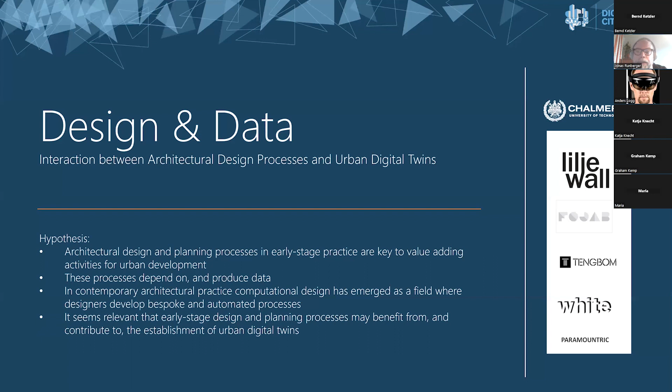There is also an emerging or quite established field referred to as computational design, meaning that architects and designers develop bespoke and automated processes that deal with data. So for us, it seems very relevant that early stage design and planning processes can benefit from and contribute to urban data in different ways, also at the architectural scale.

The objectives have been to identify data-intensive processes, develop automated design workflows that can use and deliver data to urban digital twins, and map these to propose a framework for how data can be exchanged.

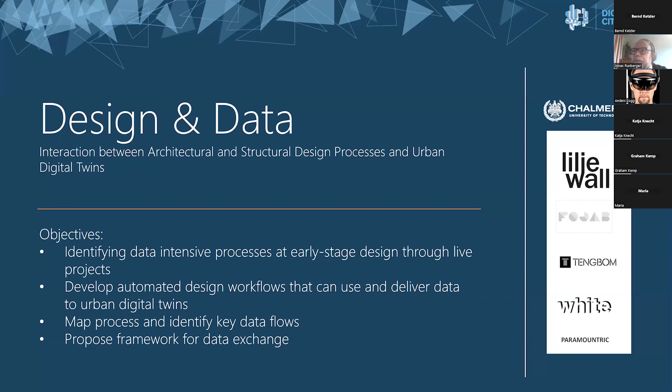There are three main application areas that depend on the partners you can see to the right: Chalmers, but also Liljewall, FOJAB, Tengbom, and White as architectural practices, and Paramountric as software developer. These areas include bespoke generative design and processes at different scales, processes depending on architectural and structural design, interoperability and collaboration, and design to manufacturing processes.

There were a number of case projects involved, coming from our partners, and that was a key asset - we considered using live cases. Many of these were collected, some were not used so much. In one case, a project was used only to test different cloud services. We had some organizational changes, and one of the cases moved actually to another milestone project.

I will talk now about 4 cases and go quickly through them to give an idea of what these processes can be like. The status is that these cases have been completed, but we're still doing the final conclusions on a framework that can enable this exchange of data.

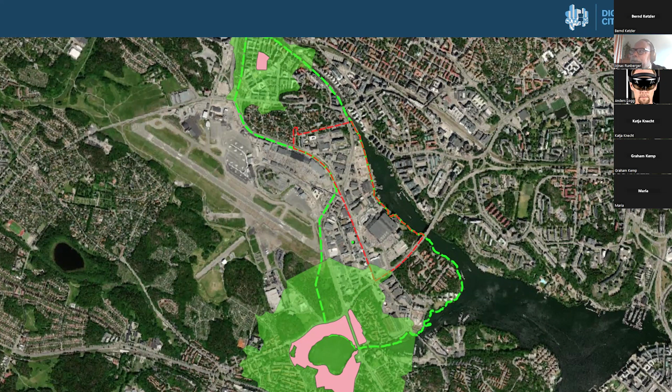This is Bällstahamn, northwestern Stockholm, where Tengbom had developed a scheme. This is the particular area - I will not go through the developed proposal, but rather look at the workflows that were explored and tested.

In this case, the input used was GIS data from QGIS as a test. I will come back to Speckle as a platform used for data exchange. An urban generator was developed, and there were also tests for a building generator, and finally a validation of the result.

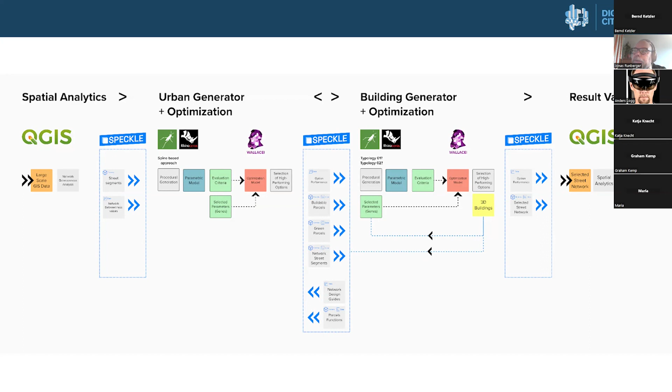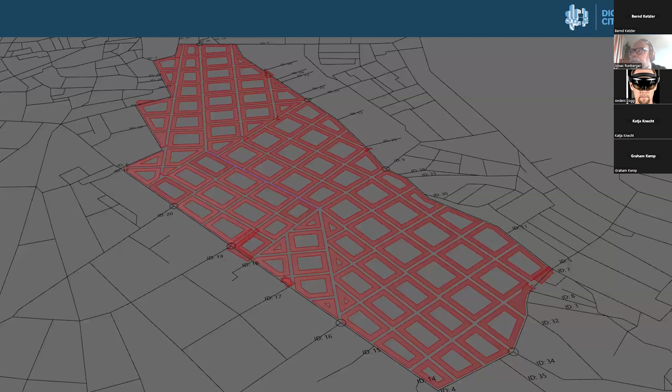This, on one hand, also depended on space syntax integration analysis and how the proposal affects that. But in essence, it was a quite direct exploration of the possibility to generate alternate street networks and see how that affected the surroundings.

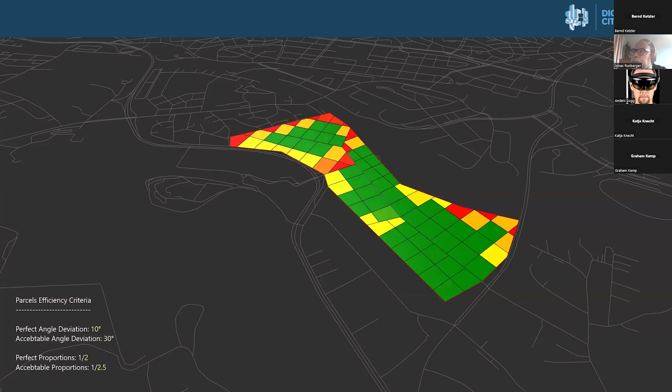Also, to certain extents, volumetric generation. One important notion was the assessment of parcels, the plots for buildings or other development. That was a key aspect analyzed in terms of its complexity or potential use, and the color code indicates that.

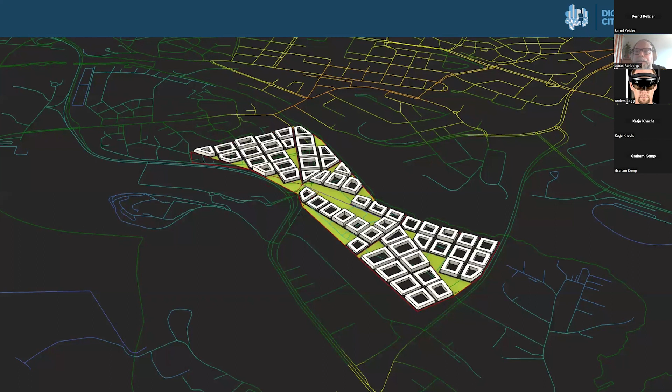There was, as mentioned, a very basic generation of urban volumes here as well, fully automated. The cloud connector Speckle, which I will talk about a bit later, also enabled a visual aspect where the data being streamed could be reviewed.

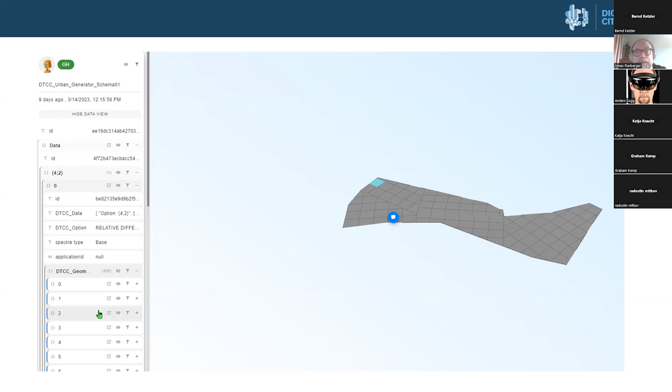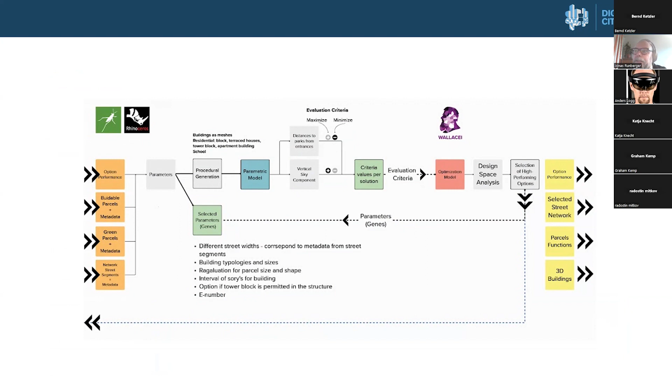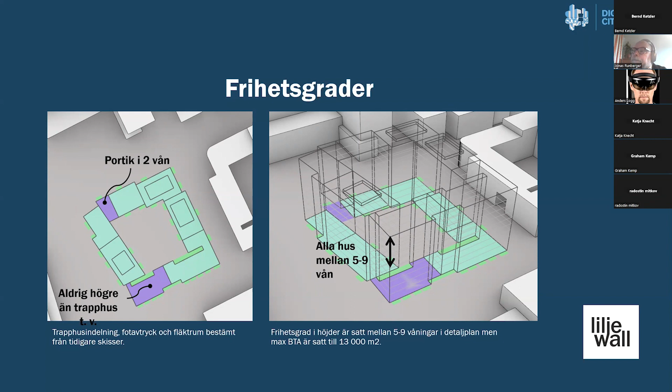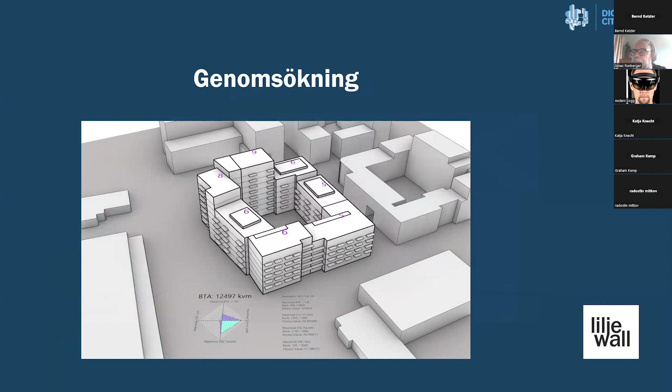A final step also tested a bit more on the building generator scale, based on input from the first process. This relied quite a bit on development done by Liljewall. These are some examples from their work brought in as a case - these are bespoke generative processes developed by themselves.

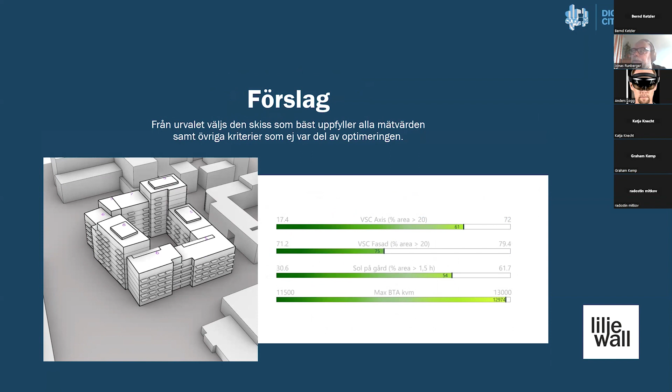For assessment, there are many other initiatives in this field now, but the second case relates more to design structure interoperability, but also design processes. It was brought in by White Architecture, where I was also at the time, and still am - a commission for 4 bridges developed in parallel in central Umeå.

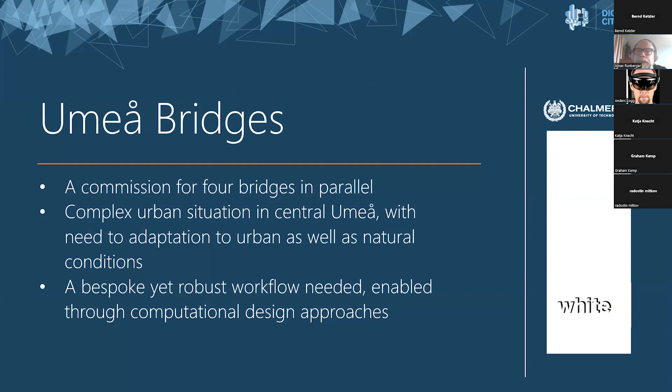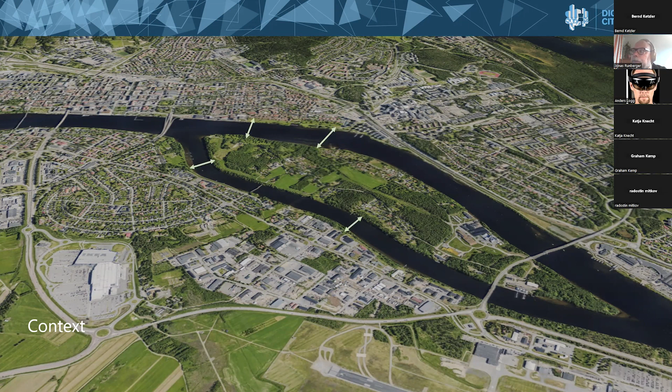This led to a quite complex process with the 4 parallel design proposals being brought up, but also the complexity of the urban situation. This set the need for a bespoke but quite robust workflow and a design system that could allow us to work with this. Briefly, the site, Norra Ön in Umeå, the new four new connections.

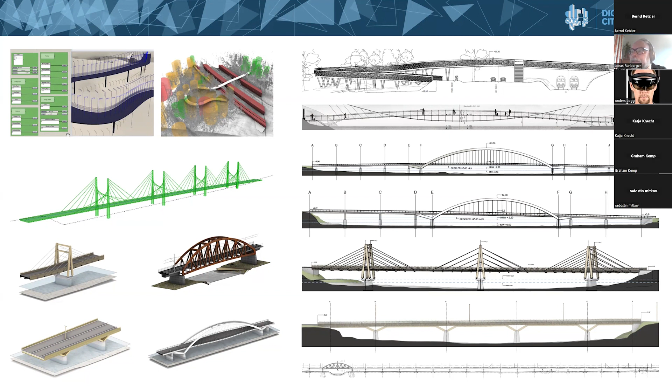And the design methods developed and used were also based on other bridge cases that we as a team had worked on. But that led to a quite good understanding of what's needed to explore the design, develop its geometry, and later on potentially also set it back into an urban context.

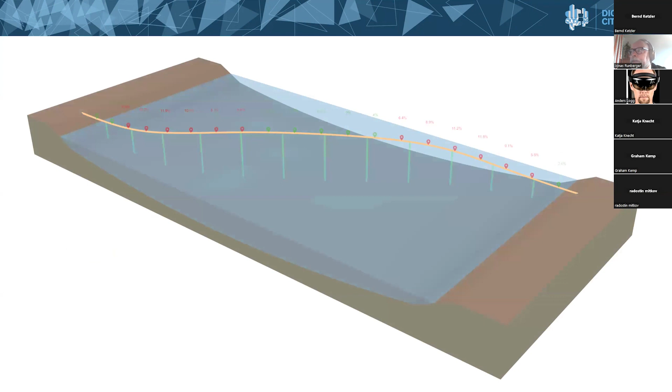The bridge principle itself follows quite a linear workflow with a number of different definitions. I will just now quickly step through a graphical presentation of this toolkit, which also includes analysis in different ways. There's the possibility to first automatically model a very simple geometry for rapid processes.

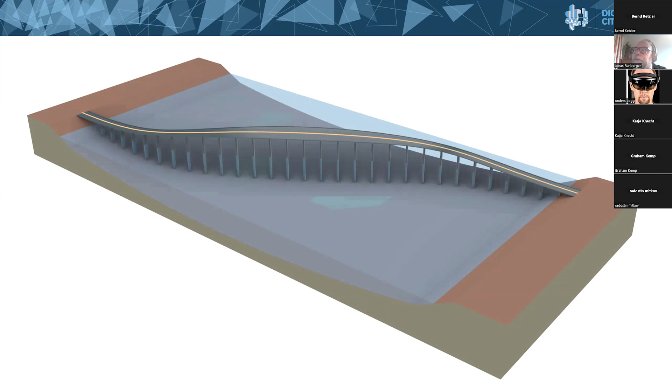In this case, identifying larger spans, then the bridge deck as being produced, structure, and ultimately also the bridge superstructure, where different typologies could be used, and everything is parameterized and can be changed.

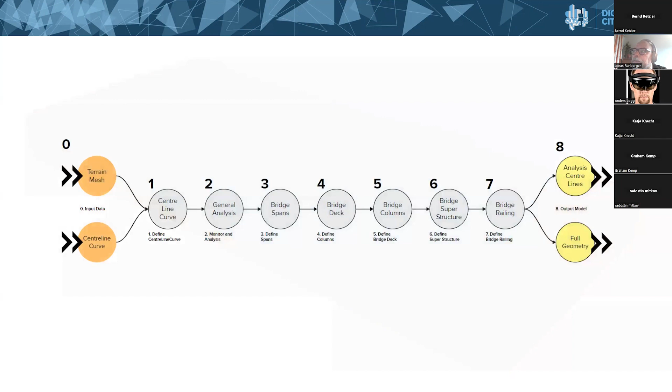So this is the final version, also with railings and a slightly more comprehensive view of the design system. This process led to the possibility to develop these 4 different proposals and enable that.

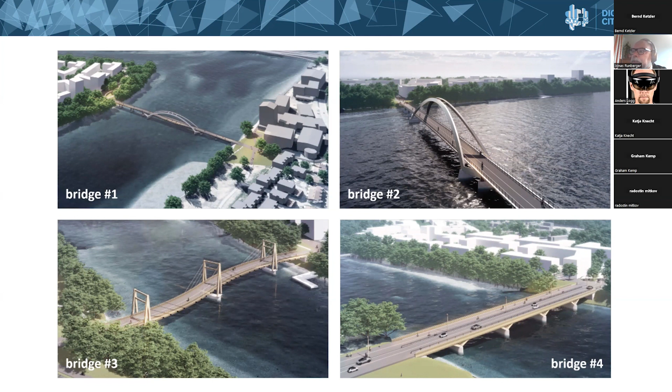And of course, these images are real-time visualizations, so it also depended on getting urban data and geometry into the models to assess them in their context, something which was done directly from GIS data and information provided by the client, the municipality of Umeå.

The next case is a series of methods and then an emerging offer, we could say, that deals with reuse of materials used in early stage design at architecture scales. This was developed over a set of initiatives by White Architecture, and the whole thing is packaged into something we call Remake.

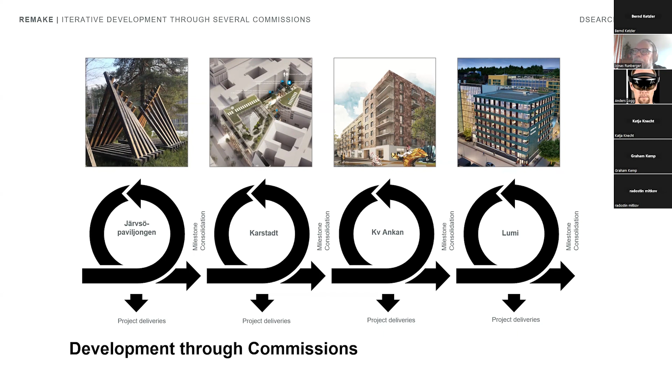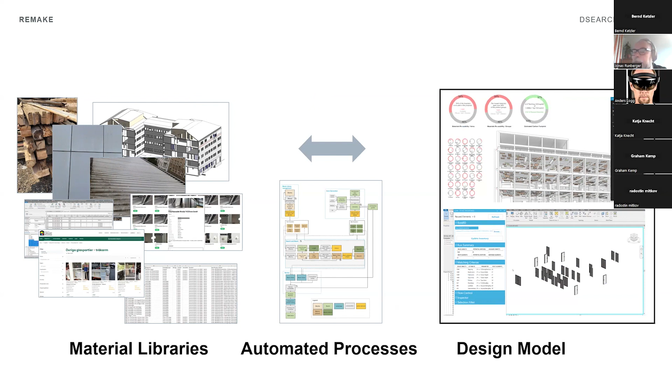So 4 cases have been used, and in each project, the methodology has been developed further. The first case, the principle for us, is really to connect the material library, a database of some kind, regardless of format, through an automated process with a design model, and allow direct interaction and iterative exploration, where you get updates continuously in real time on the material used and the climate impact, carbon footprint, etc.

First started in a very small project for a pavilion where oak beams from an old sawmill in Järvsö were used, which eventually led to a pavilion that were at events and finally returned to Järvsö.

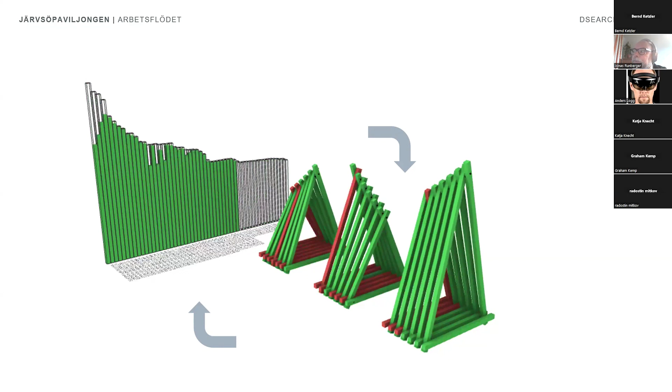But this is just to show a very immediate example of, imagine the design model to the right, which could be manipulated by the designer, and the direct feedback in terms of color coding if the beams exist in the stock seen to the left.

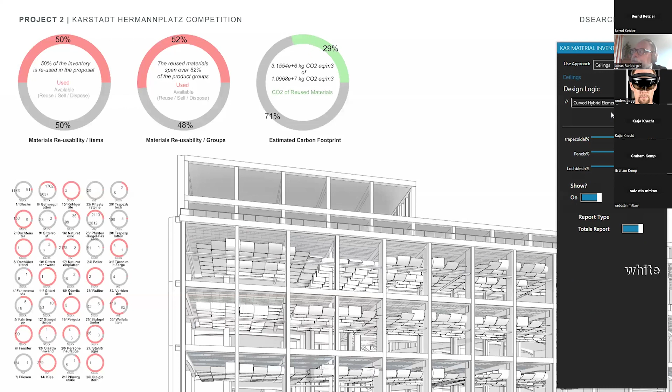Later on, it was developed further in a competition proposal in Berlin, Karstadt Hermannplatz, where there was a material library made available, and a design interface was developed for different aspects of reused materials, such as steel plates for ceilings in this case.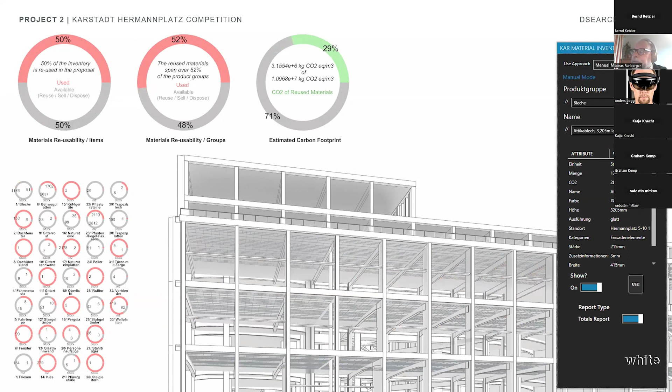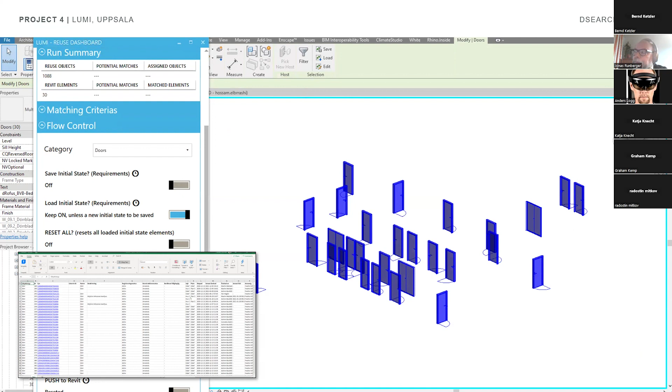And also in an ongoing commission for Lumi in Uppsala, where there was a complex situation of managing the reuse of hundreds of doors with many different criteria, such as fire regulation. So this allowed doors to be placed, and you could just use a matching algorithm to check that each door is available.

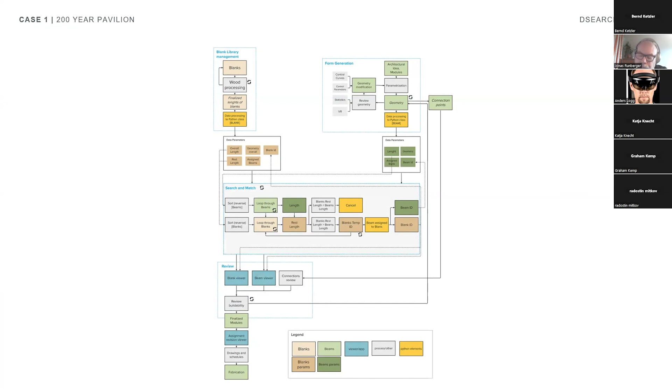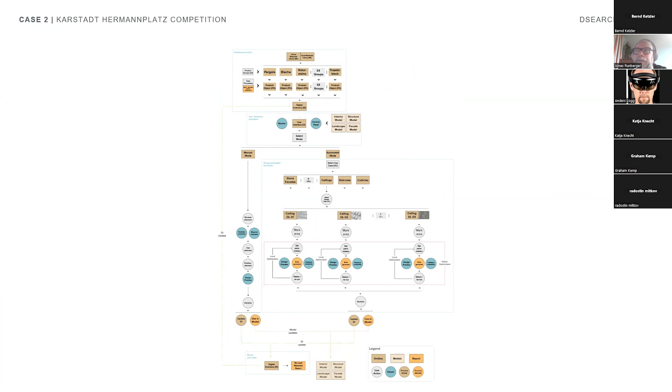So these workflows were also documented and published to get a better understanding of what's actually going on, which is a way to direct the roadmap for further development. So each reuse method is done as a small, completed package, and then there's a roadmap for future development.

The final example here is from a student competition conducted at Chalmers, with also some support by White. A student-driven competition for climate neutral, or climate positive actually, prototype buildings, where additive manufacturing was explored by the students.

The background here was initially that side streams or leftover material from the timber industry can be reused and made into biocomposite materials, which makes it a sustainable solution, complementing timber construction in general.

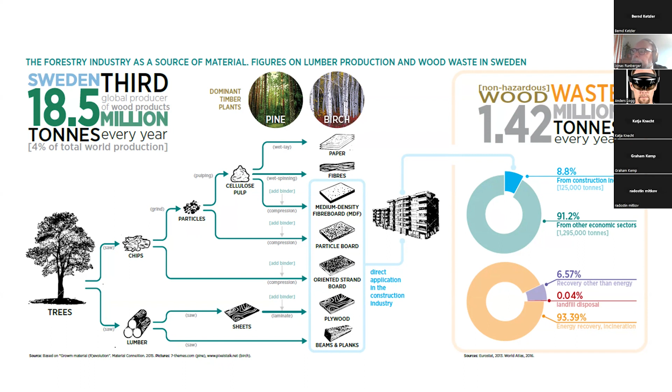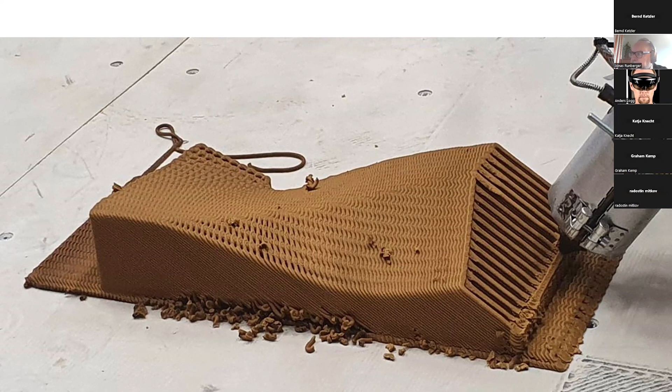The student competition is a recurring event, and this particular year it was aimed at making a prototype building in Wuppertal, Germany, where rooftop extensions was one particular theme that the students took on. The additive manufacturing principles were developed and managed together with Rise in Gothenburg, based on existing technology, but also further developing that, in particular in terms of the design methods.

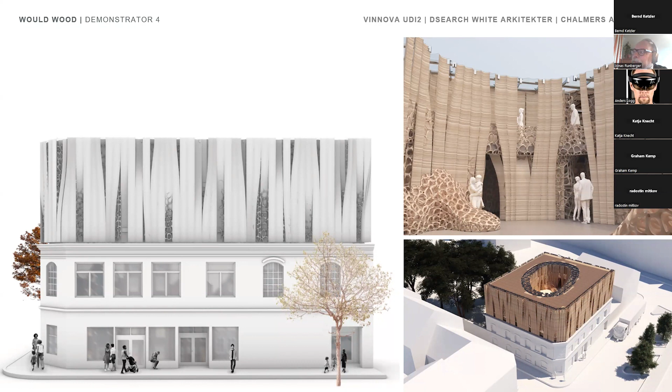So students went quite explorative here and looked both at the production technology and the scope of the competition, and explored quite expressive solutions, so to speak. But ultimately, one smaller building prototype was defined and designed through teams.

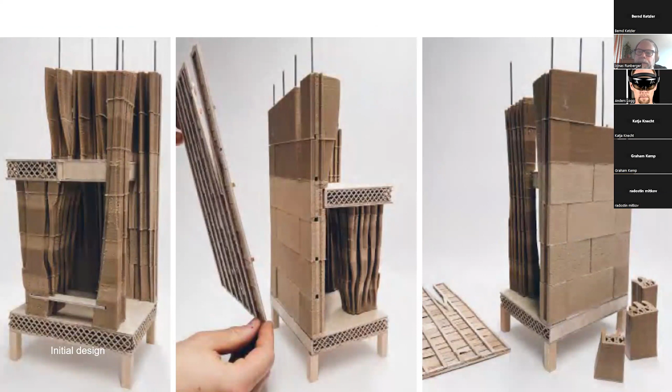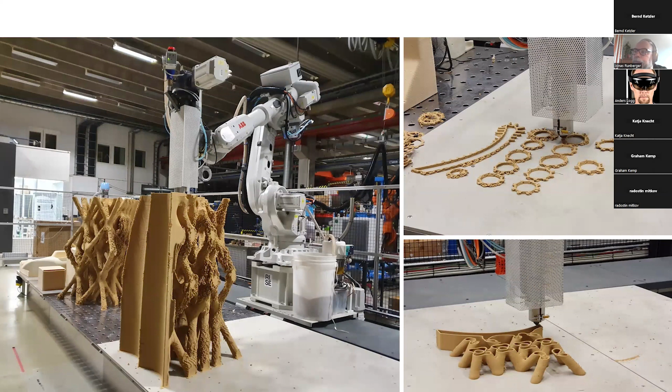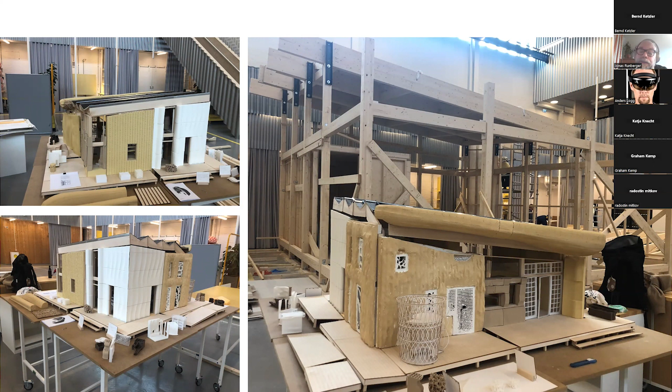Many design studies, of course, using small-scale printing technologies, and finally also producing it at full scale, different parts. This was one of the first prototypes and demonstrators presented at Chalmers previously. And finally, construction planning and testing at Chalmers still, and ultimately building the building.

And you can see that only a small part is actually produced by additive manufacturing. It was a combination.

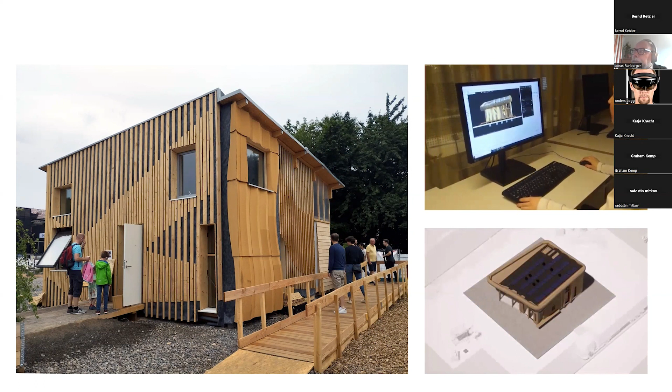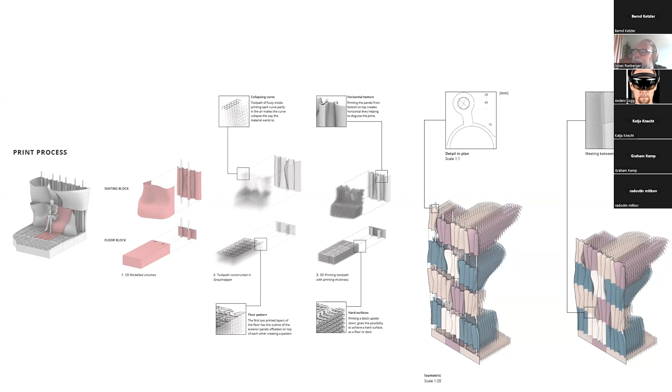So here, key development work was done in trying to connect, in a similar way as the RISE cases, the design model with the production principles, and the very basic ways of doing 3D printing that everyone can do these days, which goes from a model through an automated slicing principle to a 3D printer.

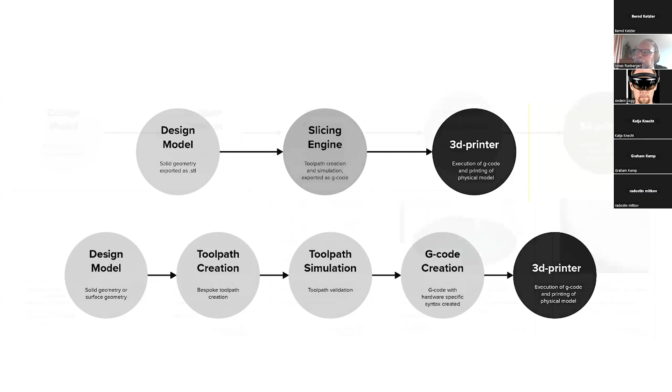But here we started to look at more advanced ways of actually controlling the tool path in different ways, with simulations, and then creating the G-code that is used. So through several steps, this was made into more and more advanced solutions for more and better control. Ultimately, the prototypes went through a number of steps where also the design itself was partly automated.

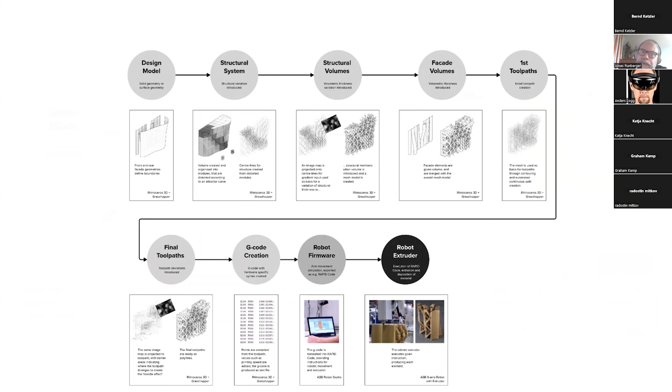So those were the cases that we worked on, and it's quite easy to see maybe a few challenges here. Each of these computational design workflows is bespoke, and it's also self-contained in many ways. A good thing is that the technical visual scripting platform and the design environment is actually the same between these very different scales.

We still see the true potential for a more integrated data approach as being untapped. One thing identified mid through the project is the need for a cloud-based platform of some kind for data exchange, coming back to the thoughts of how this can be related to urban digital twins. And Speckle as a platform that we used and tested, which was still, and is still, under development.

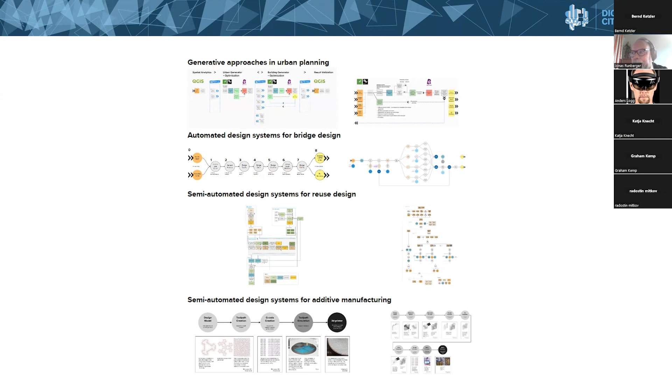So to give a brief overview of what this challenge and potential is, these are 4 of roughly mapped workflows that are, of course, distinct and, as mentioned, bespoke for these particular cases. But what we have seen is that in all of these 4 cases, they could benefit from data made available, for instance, through a digital twin directly, and they could also contribute in different ways. This has been a very rough mapping of these potentials.

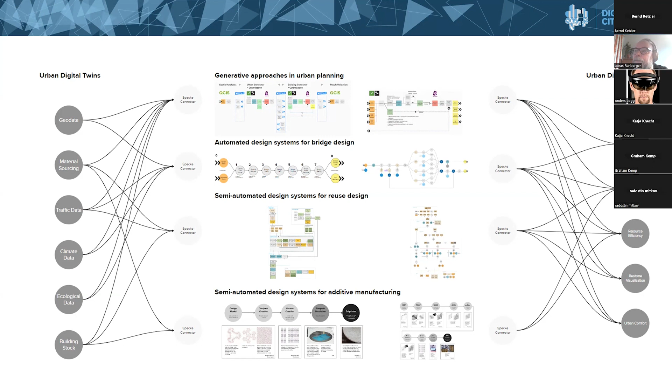And in the actual cases, for instance, in the bridge case, we did use urban data, but we did not have in the commission the possibility to use a digital twin in that case, which would have been very beneficial.

So the setup for this prototypical development has been around the modeling toolkit Rhino, which has its computational aspects developed in Grasshopper, and then has Speckle as this platform where the data exchange can happen. It's still sort of at the proto stage, but there's a belief that Speckle could then also be used further on if that's being developed at the Digital Twin Cities Centre.

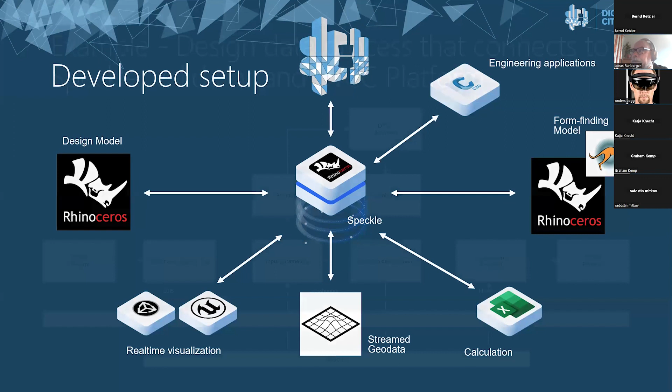One key aspect that was also pushed, and still is I believe by Paramountric, is a validator of the data, because with these very bespoke processes, there's no way to standardize the data being generated or actually being needed either. So a validator would check it so it conforms, basically.

But there are different views of how data could be received from the DTCC platform. Obviously, the urban contextual data would be very valuable, but also look at how it could actually be exchanged during the design process, and once there is a proposal, of course, to contribute to that.

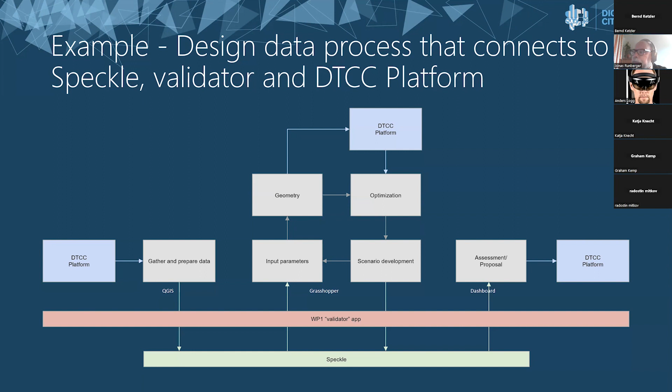So to sum up, there is a report or an assembly of the findings being compiled still by myself. But the proposal from the project is that Speckle is an interesting data model to have sort of an agnostic middle layer for exchange. There's been work producing types and schemas for this data exchange. This validation is potentially optional, but can be included. And there's also been a parallel study of semantic web technologies and an overview of the different options we considered before Speckle, and that will be part of that.